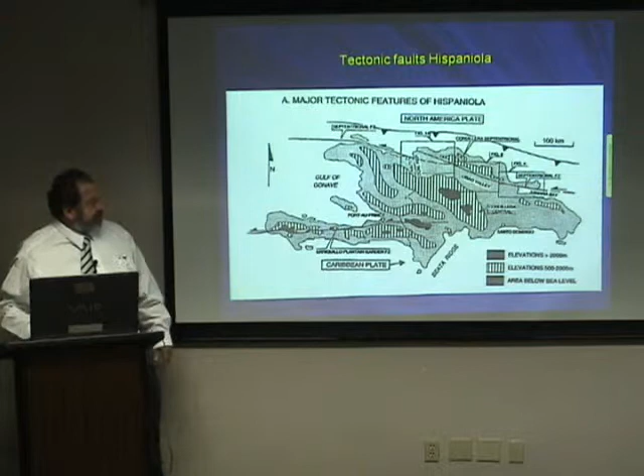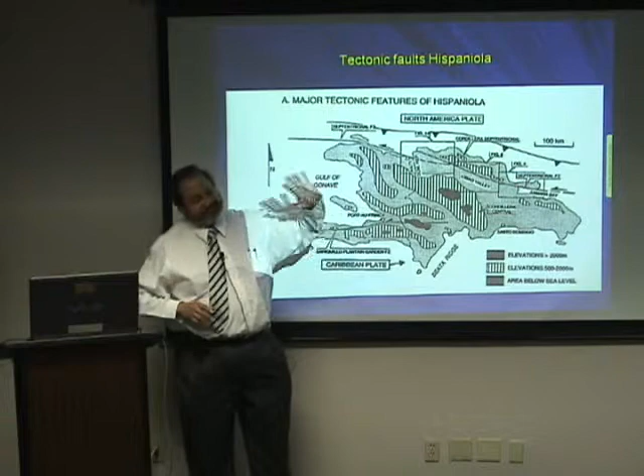It happened somewhere here. Port-au-Prince is here. It happened very close by, and the rupture was in this direction. This is very important, because you will see that the part of Port-au-Prince that is from here had very little damage, so there was a lot of directivity because of the direction of the rupture. Tectonic faults of the Hispaniola - the Enriquillo Plantain Garden fault is the one that produced this, and it stops here. Maybe not - then there is another one right here on the north of Haiti, and another one there, and this is the one that is going to destroy the center of Dominican Republic.

Historic earthquakes - you can see that the last big one was in 1770. That was a long time ago, 240 years ago. So the collective memory of these people with respect to earthquakes did not exist. 240 divided by 20 is 12 generations. In 12 generations, you forget everything. You even forget math - just look at some of the countries in the world that invented math, and they don't have it anymore.

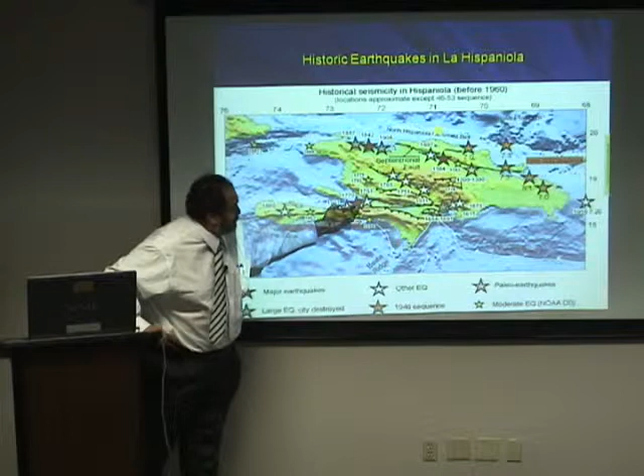So that happened there, and there have been major earthquakes here. But since they're so far apart in time, nobody paid attention to the earthquake risk. Now they're going to pay attention, and this is the opportunity we have to seize to produce something worthwhile in terms of earthquake design.

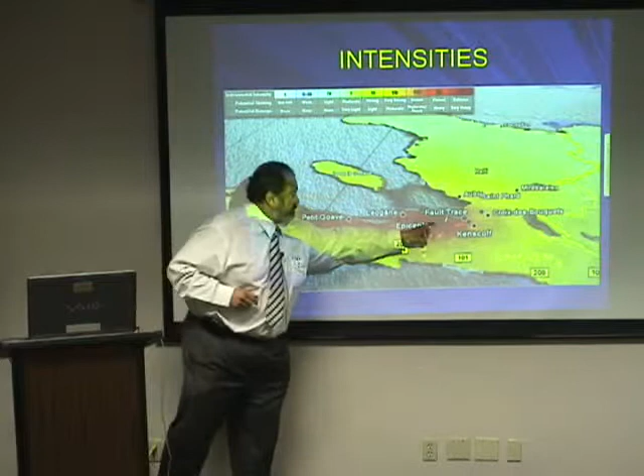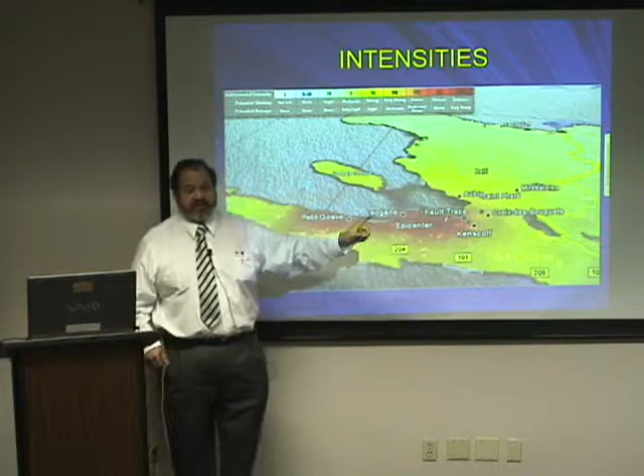The epicenter is here, the rupture is in this direction, and all these towns were more affected than this area. Now, Léogâne was 90% destroyed, and this town was also very, very destroyed. The estimates from USGS are that the PGA was about...

30% G, which, in my opinion, based on what I saw, I think is very small. I think it's a little bit higher than that. This is a period of 0.3 seconds, that's 0.6 G. So for the peak of the spectra, you're having 0.6 G.

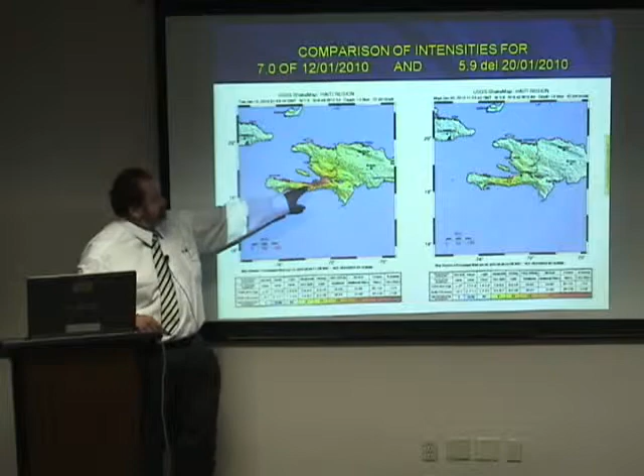And this is the comparison. We're going to go fast through this. This is the intensity map for the main shock and for a shock that was a 5.9. I was there, and I didn't feel it because I was driving at 6 o'clock in the morning, and I couldn't feel it. So that's why I always use my computer.

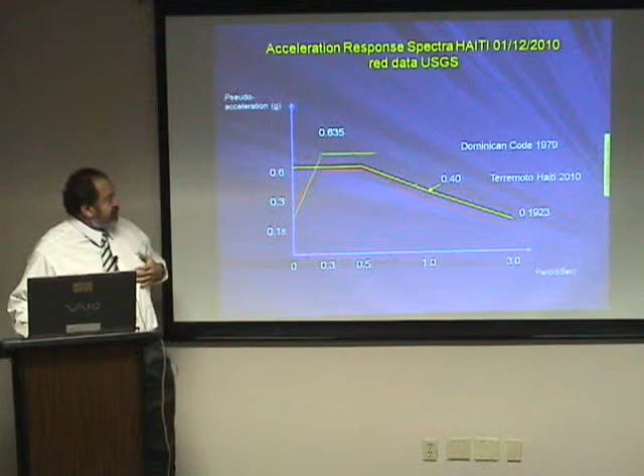So this is the Dominican code, and the earthquake in Haiti is the red one. So the Dominicans are very happy with this, because they say, well, our code complies with that. The only problem is that USGS just published data that puts this at twice. So the earthquake they can expect there is about twice as much.

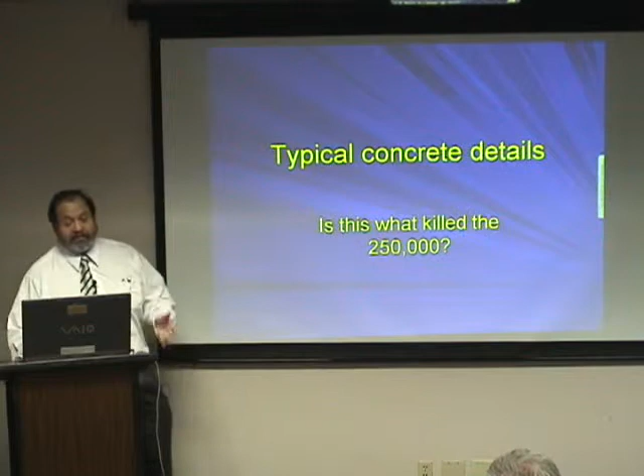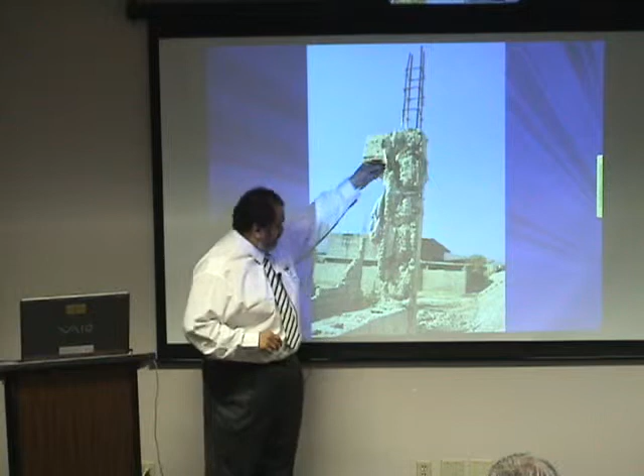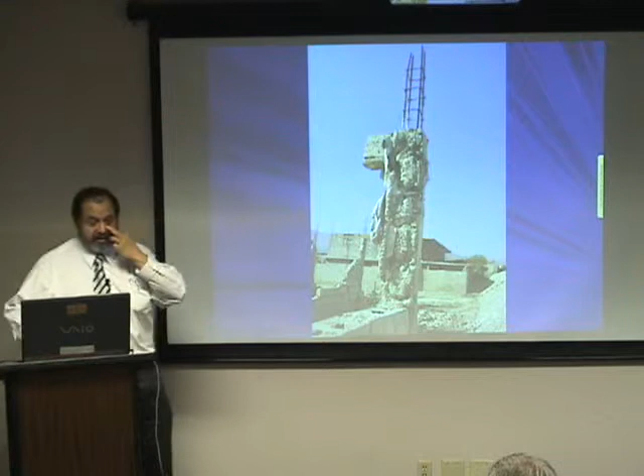So, now let's look at the concrete details. Is this what killed the people? This is a column that had a wall here, there was a wall here, and this is a column that has 4 little bars, and the stirrups are 1/4 of an inch. Some of these bars are number 3 bars, and some of them are number 4 bars. And look at the quality.

Now you see this open, this is open stirrups, open stirrups. They had them in Chile also, so don't think that it's only here. They had the open hoops in Chile, and that's how big, that's my finger, okay, so that's how big the bars are. Very small, very little reinforcing, and that's the spacing of the bars.

Very little, and that's the typical construction. You have a wall, a block wall that you build first, and you leave the reinforcement, and then put 2 formworks on the side, and then fill it with concrete, with bad quality concrete and not very well consolidated, as you're going to see later on. See, that's the consolidation of the concrete. So those are the details of a building in downtown that collapsed.

First, this is smooth bars. Smooth bars, no joint confinement, and this is secondary failure. Don't think that this is the main failure. The main failure was on the first floor. But this is how the joints were everywhere.

So that's what happened. Smooth bars with very little reinforcement. The same thing here. You can see very little reinforcement, all smooth bars, and the lap joints were not long enough.

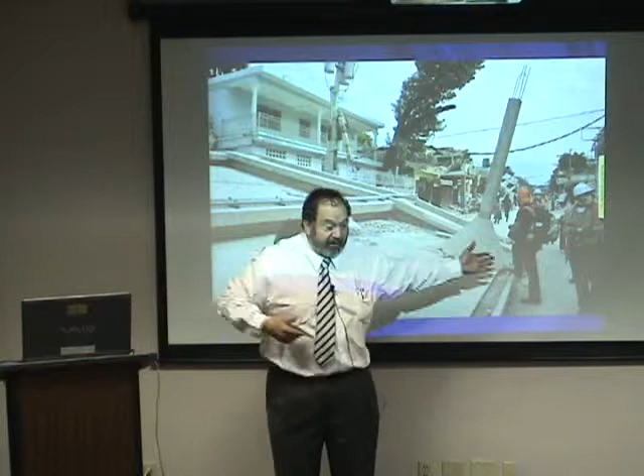This was here, you can see it better there. It was here. Somebody in their mind said, I need another floor, and I don't have a column underneath. So I'm going to put this big cone to spread the load, and then put a column there. They were about to put another floor here, you know? That's the level of construction that they have there.

I mean, I don't know if there was an engineer. I'm sure that, you know, maybe there was an engineer, because how would the builder, the guy that is going to build this thing, think that they have to spread the load? Yeah, maybe there was an engineer there, but yeah, that's the level, okay? That's the level of stuff.

Now, I went to this building a month later, and it was exactly the same. A month later, it has not moved. I'm going to go in about 3 weeks, I'm going to go again, you know, and see if it's still there.

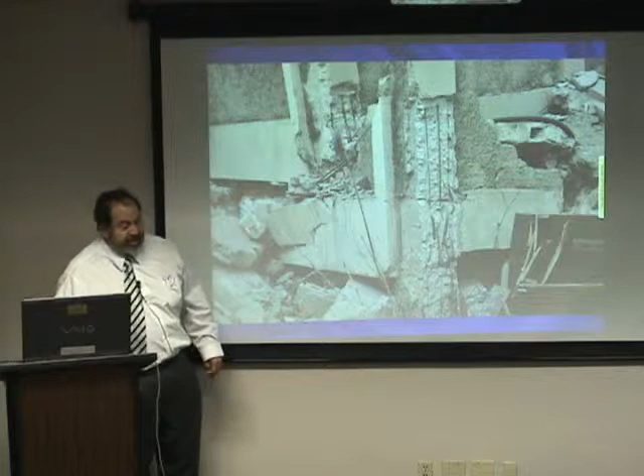But the demolition, and you'll see, the demolition was being done by two people. A 5-story building. There were two people with a chisel and a sledgehammer, and that's what they used to recover the steel, because this is valuable.

Okay, this is so that we can see. We're going to try to solve this problem. JP has just told you, hey look, we got to solve this problem, we got to help them. We got to know, so that you get into the mind of these people and think, what is happening? How can we help them with their mind? Because we cannot just go there and say, okay, we are Americans, and we're going to do these things, and we're going to solve the problem. No, it has to be integrated with their way of thinking, you know?

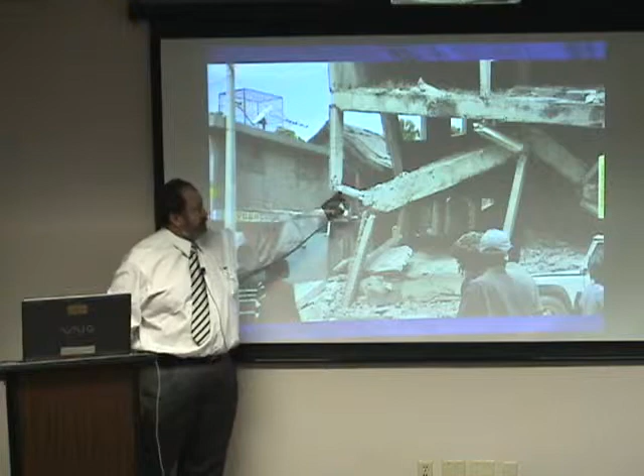There's one story here that is non-existent, and this is a 6-inch column for a 4-story building on the first floor. You can see that there's no steel in the joints, and the column breaks in the middle, and that's the connection. This is the type of connection that you have.

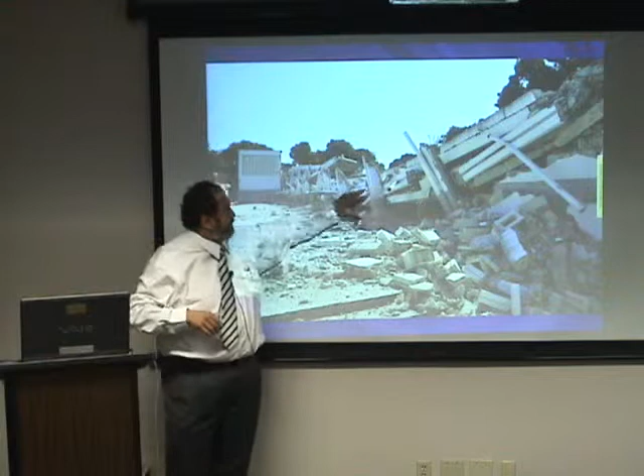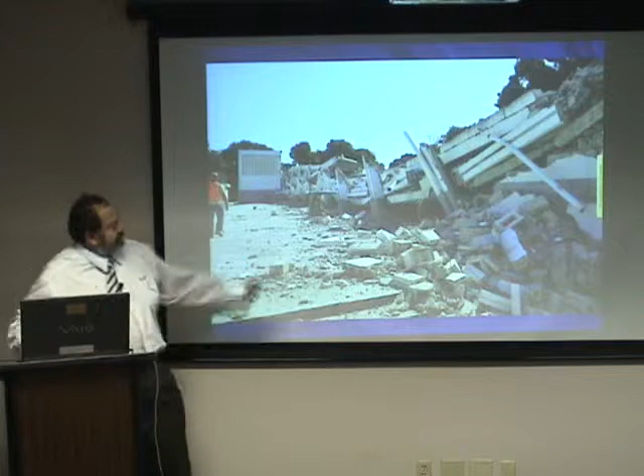Now this is the school itself, and you see there's 300 nurses that died here. You can see, wow, what happened here? But fortunately, in many of these structures, not everything falls - only some parts fall, and this is a great example of what happened. So you see here and say, well, I know this part failed but I don't know why. Then you see there, yes it failed, but I don't know why. Then you start looking more and say, let me go - this part is not. Now you see this one - there is where you're going to find out what happened.

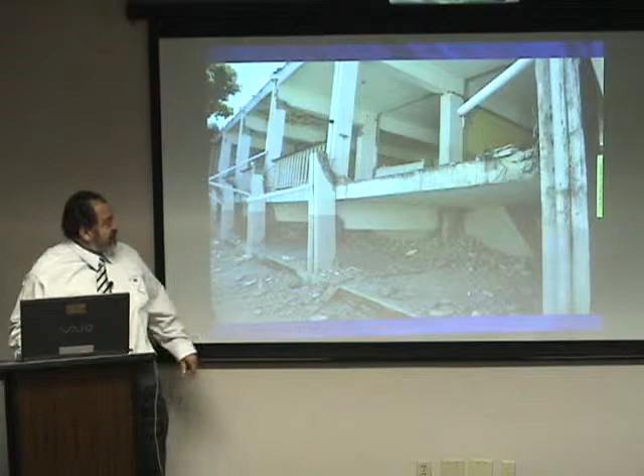So you see it, and then look at this - this thing was up here. You can see, whoop, this was up here. This thing moved like this, the joint - you can see that this joint failed, and then it slid down there.

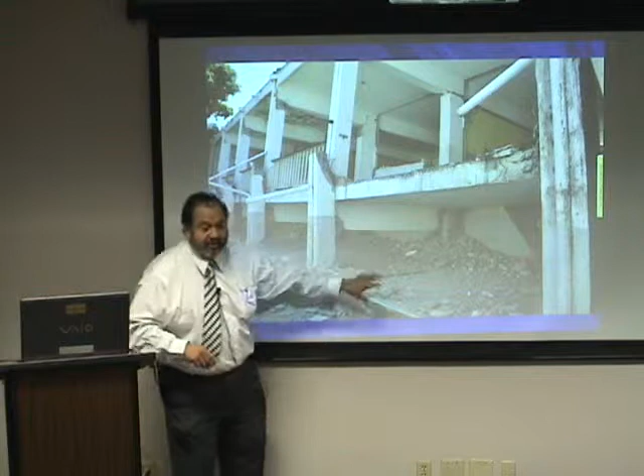Now that's a good clue, but what else happened? When you investigate damage, you ask why did that happen? And then you go look at this, and across, in the same area, you see this undamaged building. Oh, I wish it had some little damage to see what happened. And you go to the corner and you see the little damage - ah, look, and then you see here.

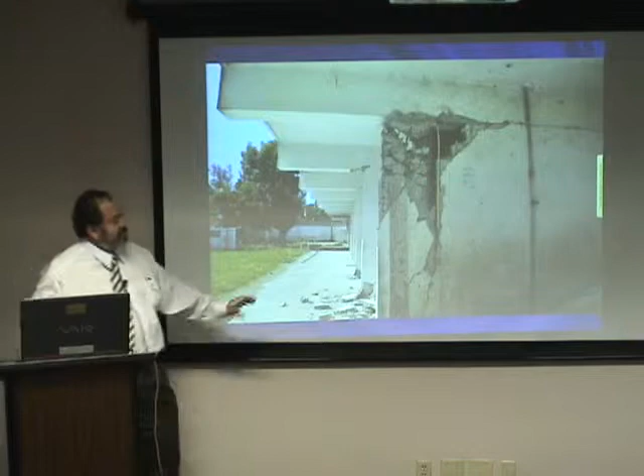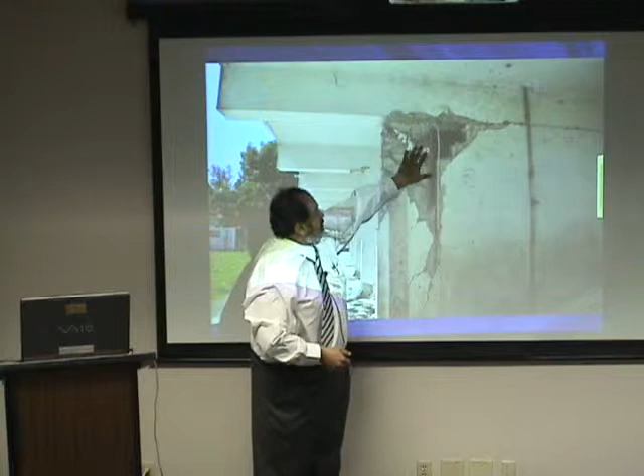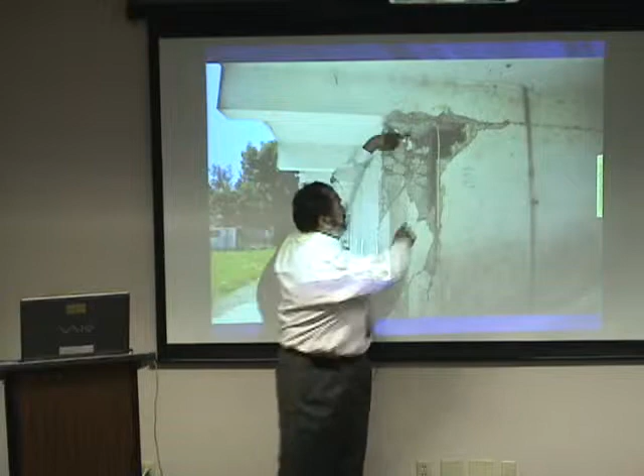This is what happened - this strut is pushing this thing, and you can see that it's deformed, and the concrete went away. It had some hoops, not enough. But the worst part is that the first time I saw this thing was in Turkey - it was the earthquake-made short column. You've heard about short columns - they try to deform in shear, and with this much concrete you cannot have enough deformation to absorb the spectral displacement that this earthquake comes at, whatever the period, 0.2, 0.3 seconds. You cannot have enough capacity of deformation, so these things fail.

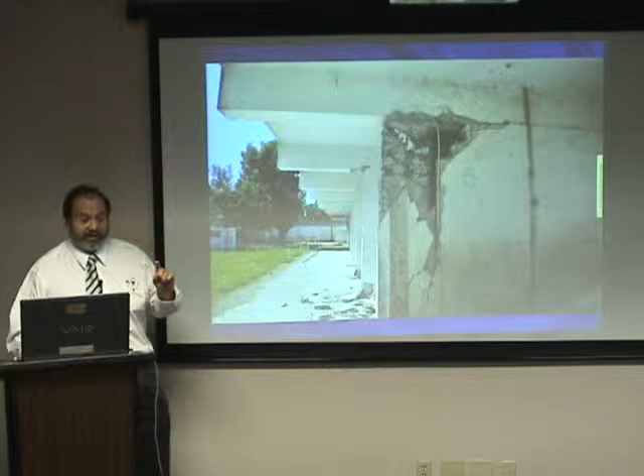But this was made by the earthquake, and we saw it's like the same thing we saw in Turkey - the earthquake-made soft story. You have a building with walls everywhere, but the shear is bigger on the first floor. So the first floor gets damaged, walls fall out of plane, and now you have a soft story, and you get collapse.

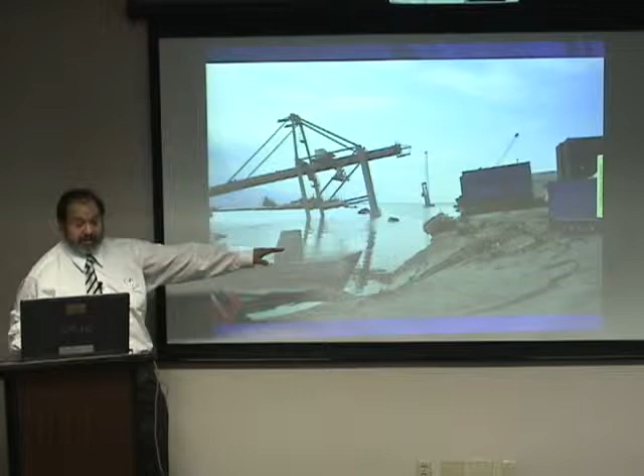There was damage because there was fill. All these parts you see white is liquefaction. You'll see that's the side of the port where it was not compacted - it was just rubble that they put in there, then they put the asphalt, and all this white stuff is liquefaction. So you get lateral spreading, destruction of the fill, and liquefaction at the same time. All the white stuff is liquefaction.

Liquefaction there. The port was here, and that's the crane. Now you see all this white thing? You see the level of water was here. After the earthquake starts shaking, the water comes up, the earthquake stops, and the water comes down again and disappears. But this is the mark of how much water was ejected there. This is for the people that are specialists in soils and liquefaction - you can have this much water.

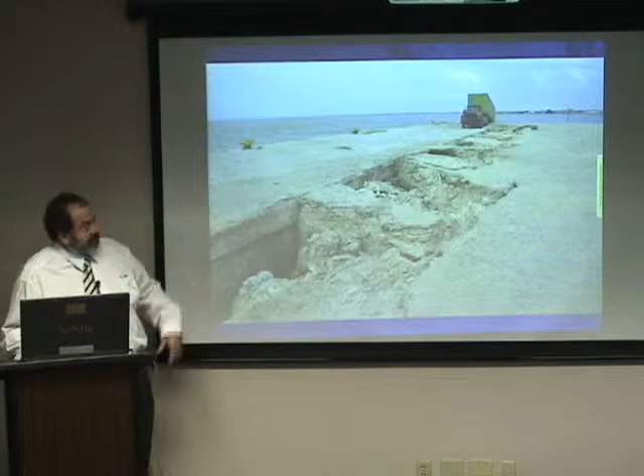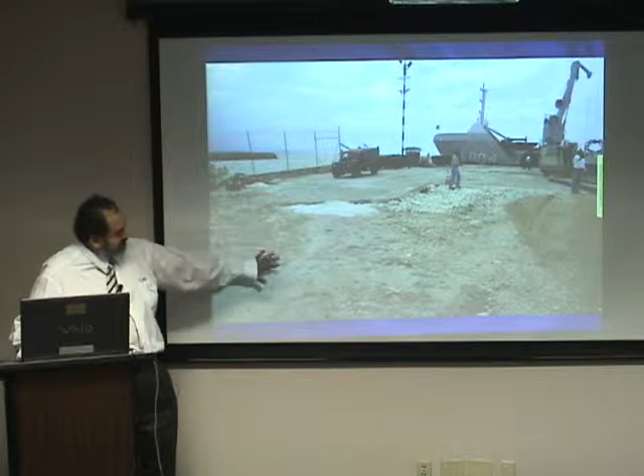The fuel port - there's a fuel port here. There are the fuel tanks here, and this was the port. This was the port, and then the whole part collapsed. This is the collapse, and you can see the guy was lucky there - half a truck was inside. Lucky guy. Then you ask, what happened here? You start looking, and there was some subsidence here, already filled in, because between the port and the land there was a hole.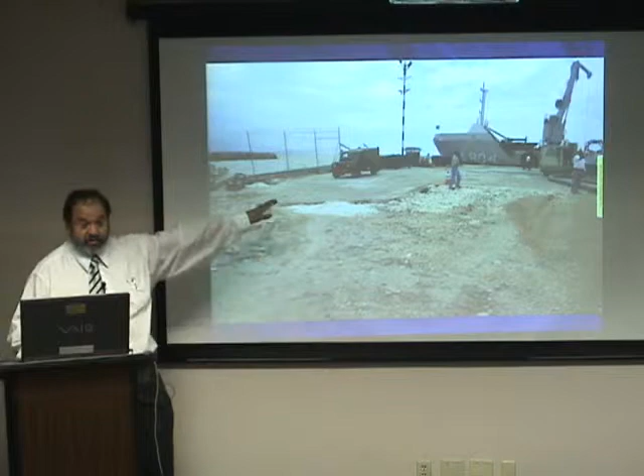So people wanted to use this thing. I see this thing there, and they wanted to use this one. They said, oh maybe we can use that one also. I said let's look at what happened - I don't think so. Then I went and took pictures one by one of the piers, and you can see here that it's already gone. Another one that's already out.

What kind of piers do they use? There are steel piers here with a cap, not attached - just gravity. You can see them there, not attached. They build this thing and then put the deck on top. All of them.

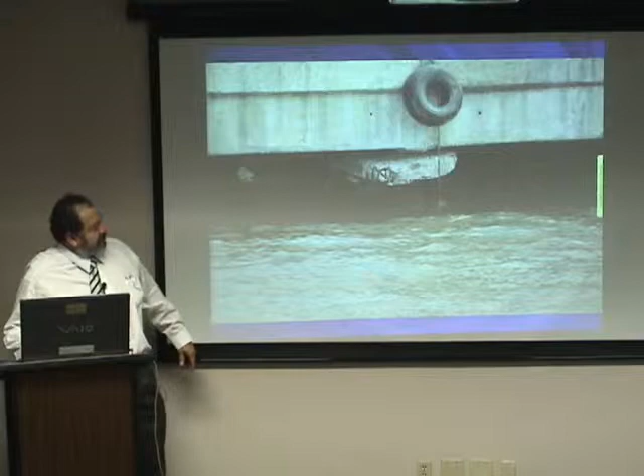It's an active earthquake zone, isn't it? Yeah, wow - 240 years. There has not been an earthquake here. I mean, you were late, but yeah, there were - there hasn't been an earthquake here for 240 years, you know. So they forgot.

And there you go - this is something I never believe in. Everybody tells me, oh, punching shear, you have to design for punching shear. Forget about punching shear - this is punching shear, the piles. And up there, that's punching shear on the slab of the pier.

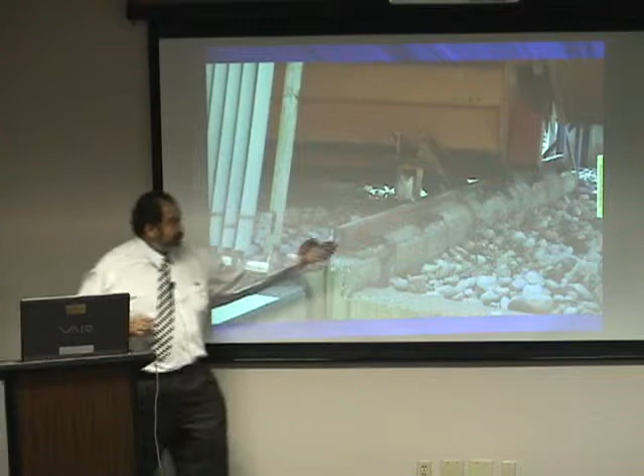Electrical power plants - there's one next to the other one. One given by the government of Venezuela, which behaved better than the old one. And that's the old one we're talking about. Transformers - they fall. Six transformers, one of them fell. If it was a little harder, all of them would have fallen. They're always on wheels, because every 3 years they have to repair them, but just put a bolt - and that's the support they had. So if you put something like that in an earthquake zone, it's going to fall. Don't do it, please.

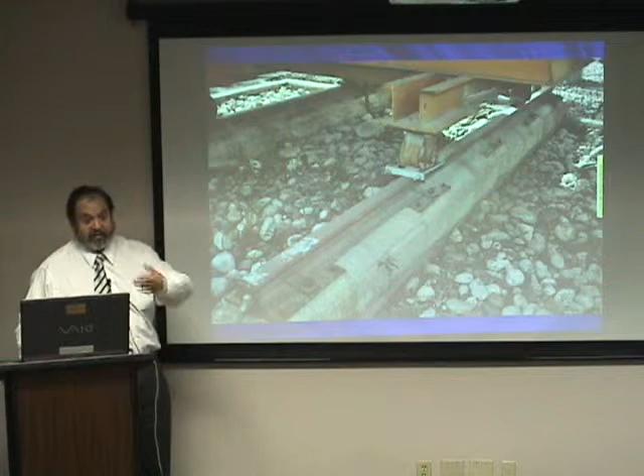Now you have seen it. That's why I go to earthquakes, so that I don't make the mistakes other people have made. And that's why I come here to tell you, so that you know you shouldn't do these things. Now, motor control centers, see?

Not anchored. Oh, they're very heavy and I cannot move them. Of course you cannot move them, but the force is proportional to the mass, you know? You don't have enough force to move them and they seem anchored, but they're not. So you have to anchor them.

This is the duct, the exhaust from the generators. It comes out, and the opening was not designed properly with enough clearance so that the building can move and the thing not get damaged. And you see it, all of the exhaust pipes got damaged at that time.

Now this is the other power plant, the Alba power plant. Mr. Chavez from Venezuela gave these people this plant. You look at this thing, and these ones are normally damaged, and they were not, meaning the earthquake was strong, but not that strong, because these things take about 0.35, 0.4 G without damage. So, and then you see this, and then I look at these transformers, and I say, well, nothing happened to this.

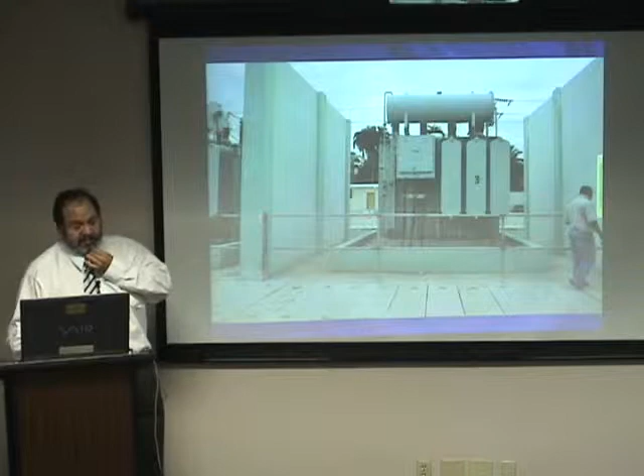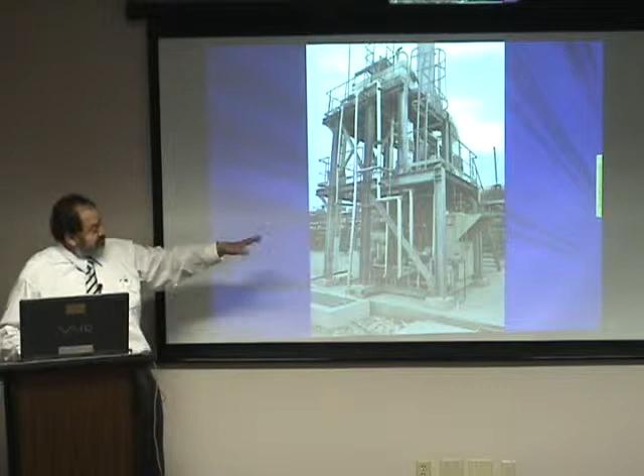And then I observe closely, and you can see here that these bolts were pulled. All of them were pulled. No major damage, but they were pulled. All 6 transformers that they had were pulled. And this is a steel structure. Nothing happened to it. Not 100% good design, but 90% good design.

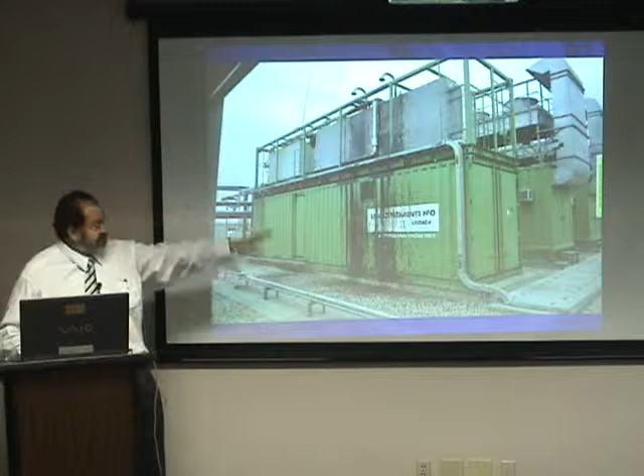There's oil from the generators. Yeah, and this is firewater. At least one tank that has 80 cubic meters and the other one that has 100 cubic meters, so 20% different in weight. This one collapsed. This was sitting on, this is a block that was sitting up there.

I'm going to show it to you. Yeah, it was like this, like this one. But why did it collapse? First, it didn't have any steel, very little steel. It had some steel, but very little. You can see it here.

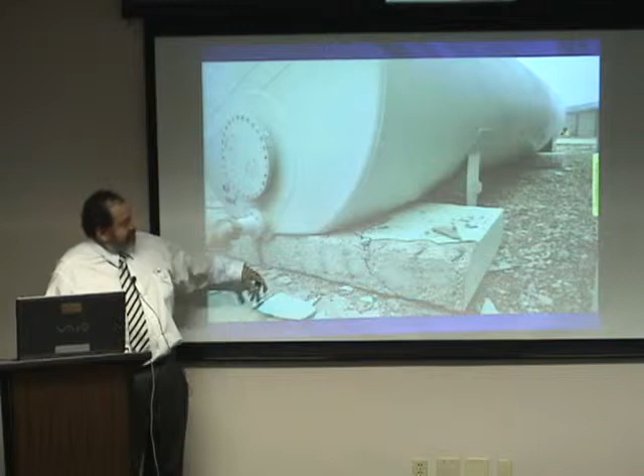It pulled, you know, this is your tension failure, the one in the experiments. And maybe if you were lucky, you've seen them. But this didn't fall because this thing fell first.

It fell because on one side they got welded, and they didn't do it right, so they put one weld, and then you're shimming this thing to death, and then the same thing on the other side, you put the shims, and since this is hot, you have to let them move. So on the other side, you don't put anything. So the other side has no support, not horizontal support in any direction.

So that's what happened. So what I think happened here was that the weld broke, this thing went like this, and at the point where it was falling, it hit the wall with speed and then broke the blocks. So, sorry, if you don't attach your tanks and put pipes next to it, they will fall, they will break. Okay? Nothing happened to this, but it's unusable.

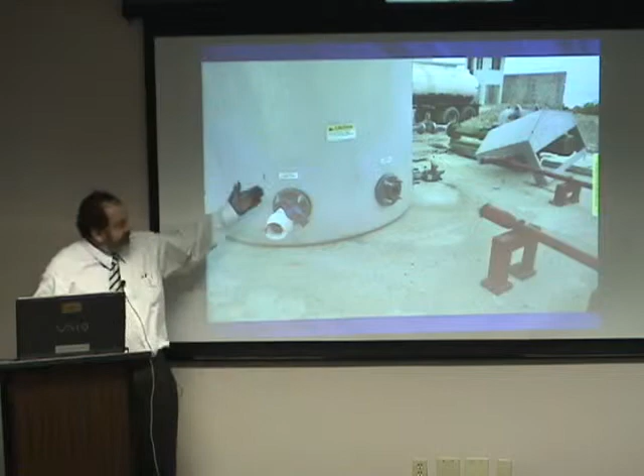And all these diesel tanks, since I think diesel is a little lighter than water, it's like 70% or something like that, or yeah, it's a little lighter. It's like oil. So 100 cubic meters, they did not fall.

Water tank. This water tank was not damaged at all. Zero damage. And you can see that there was only damage in the foundation, or not in the foundation, but around the foundation. There was nothing that happened there.

And you can see that there's this big wall, four big walls with a column in there. And that's the way that you build, so that even if you build it wrong, even if the details are wrong, the concrete is bad, if you put enough beef there, it doesn't fall.

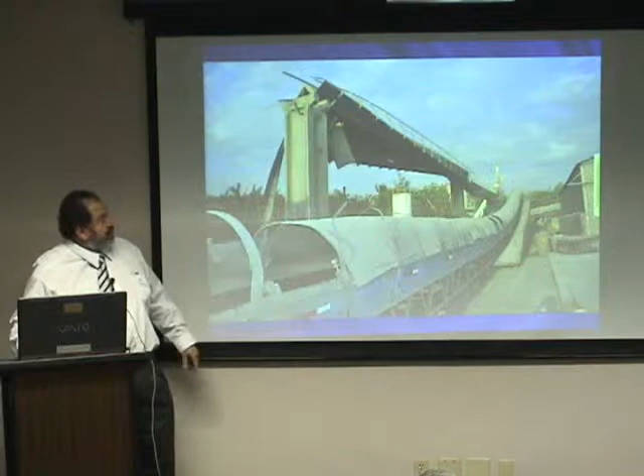This doesn't change. So, in here we have the conveyor belts that failed. The guy telling me this says, oh, that was not a failure because we're not using them. So since he was never using them, that was not a failure for their factory. But they had a lot of failures. Same thing up there.

You can see up there that there was a failure. They didn't put all the bolts, they put the bolts every other one. And you can see here the thing pull out, the whole thing pulling out. So yes, it pulls out.

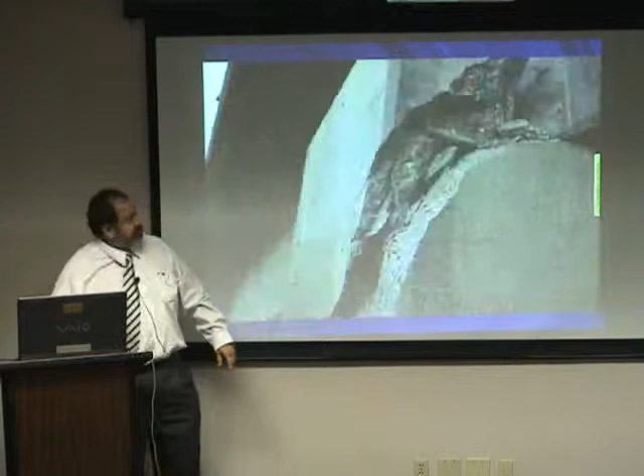Bridges. This bridge was damaged. It was not closed. Fortunately, it was not closed because there was no reason to close it. The only thing that had happened is that the support had failed. It held, but you can see there's not continuity. This thing was just put in there, and let's put some steel, and of course, there's reconstruction.

Now, for the end, allow me 5 more minutes. We're late, but this is what happened when you do things wrong. Have it in your hand, in your head: if I do something wrong and if I don't check it right, people are going to die. Okay? And that's the way the people were in the street. Okay?

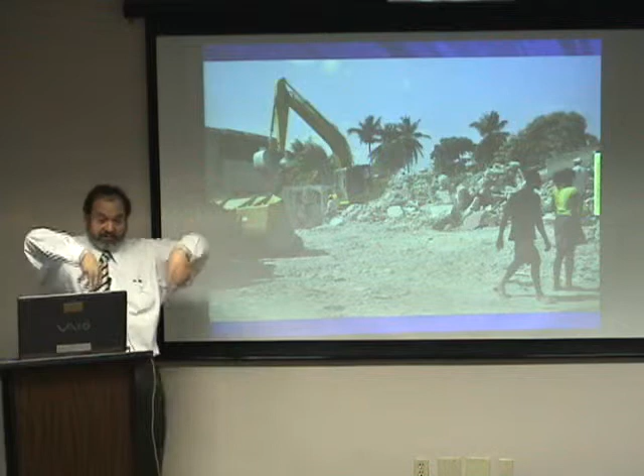Somebody tried to take these people from the rubble and had to cut their legs, and they died. What happened with the people in the collapsed buildings? After the building collapsed, they picked up the rubble with people and everything, and put it in the road. The road, they dumped the trucks with people.

So, if you have any questions.